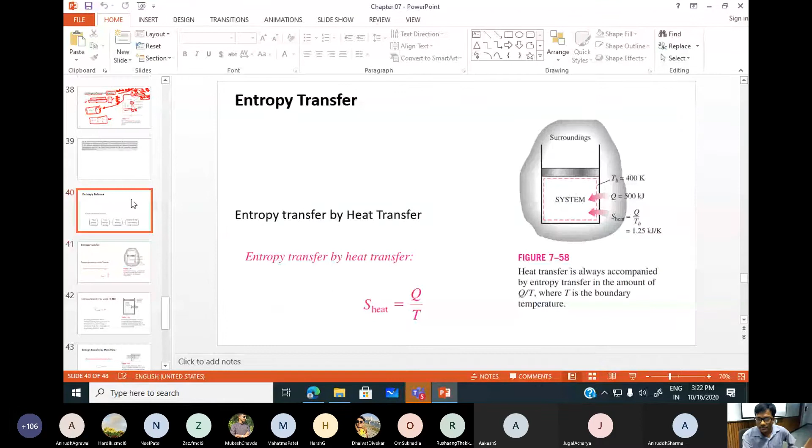Okay, so moving on to our leftover topics that we are going to discuss in this entropy chapter. I will quickly do it because we don't have much time, and most of the things we have finished. So the last topic we are going to discuss is the entropy balance.

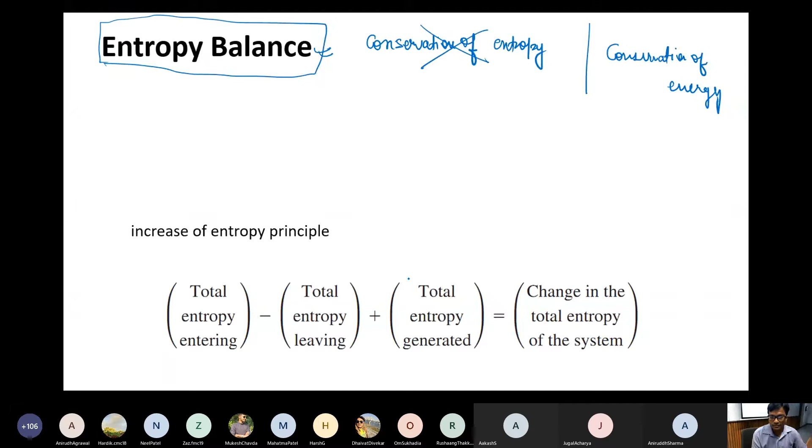So actually entropy balance is not the conservation of entropy. There is nothing called conservation of entropy. You may have seen that conservation of energy is there, but you never have seen conservation of entropy. The reason is there's an additional term called entropy generated, which is not zero, and it happens all the time except when the process is reversible, which doesn't occur in nature. So in nature things are irreversible, and this term is non-zero, giving you this form.

So change in entropy is always greater than S in minus S out. Let's suppose you have a system, some control volume, and you are looking at the entropy changes in the system. So in the system, the change in entropy at state 1 and state 2, when going from state 1 to 2, we see that change in entropy is not equal to S in minus S out.

We also have to talk about S in minus S out, which we have not talked about yet. This is the means by which entropy gets transferred - transfer of entropy into the system or out of the system.

There are several means by which entropy can transfer into the system, via the boundary, through the boundary. So we have seen that this is somewhat greater than what's coming in and coming out. So there is no conservation as such - no conservation of entropy.

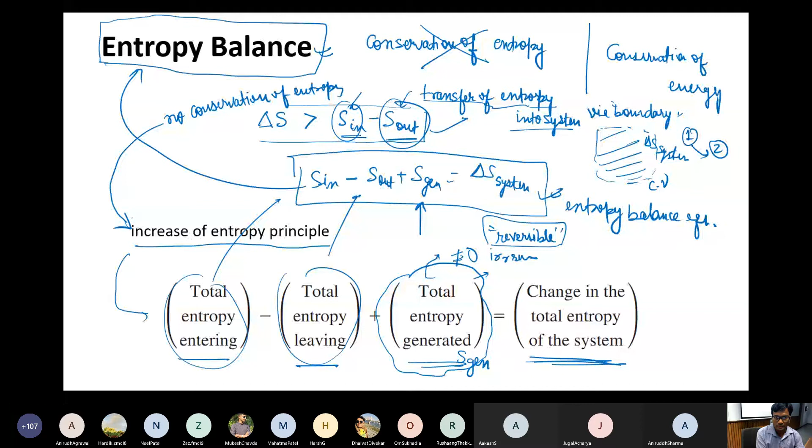Moving towards these quantities S in and S out, how transfer of entropy into the system via the boundary happens, we are going to see now. So entropy transfer is a phenomenon defined as the entropy that is going across the boundaries of the system.

So entropy going across the boundary of the system happens via two means. In energy transfer, we have already seen that energy transfer was done in three forms - what are those forms? Heat, work, and mass. So if there is heat transfer across the boundary, we can see there is energy transfer.

If there is work transfer across the boundary, we told that it's energy transfer too. Again, if some mass is coming out and into the system, yes, it is associated with some sort of energy in the form of enthalpy or all sorts of things. So there are three forms of energy transfer into the system, if at all it is happening. But here, entropy transfer happens in only two ways.

So there is heat transfer through which entropy can transfer. Through work, no entropy transfer happens - it accompanies no entropy transfer. Why? Because work is the most organized form of energy.

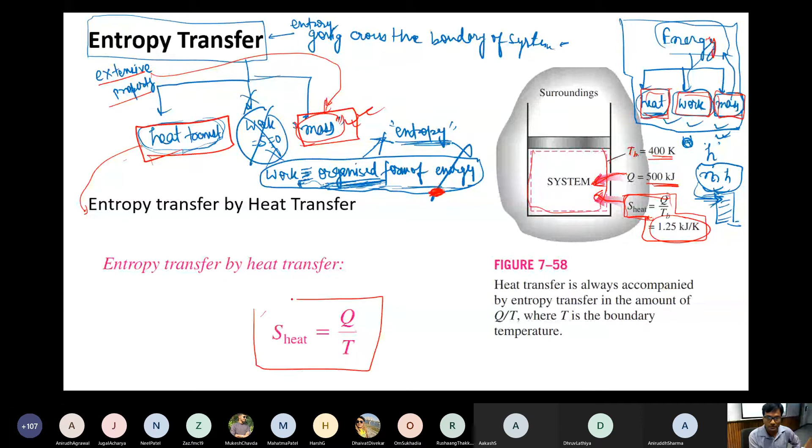And we have already told, since work is the most organized form of energy, the transfer of entropy associated with work is 0. You can move your shaft or your fan, and entropy transfer will not occur if there are no frictions. If there are frictions, something might be happening. So since this is the shaft work happening, if there is no friction, hypothetically there won't be any entropy generation, or there won't be any entropy transfer to the system from outside.

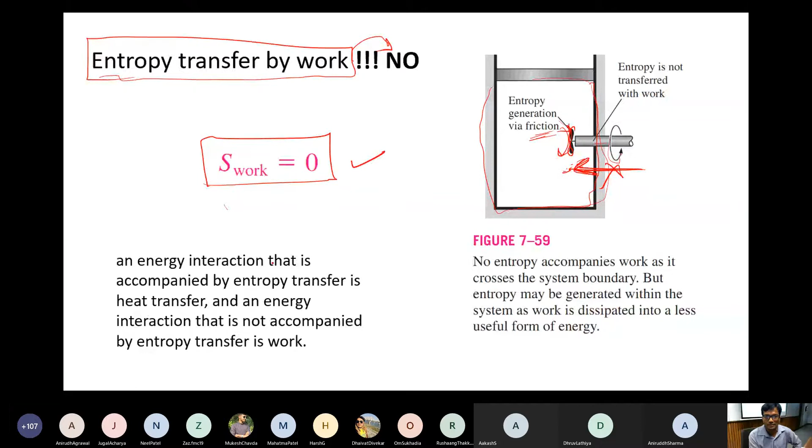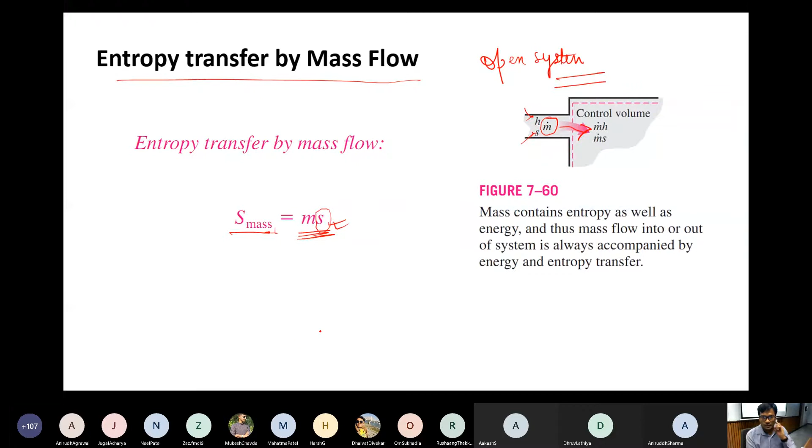Entropy transfer by mass flow is again this m dot quantity that will accompany some sort of enthalpy or entropy, going into the control volumes or open systems. Thus entropy can be transferred through mass - capital S mass through mass. This extensive entropy will be written in terms of mass times the intensive, per unit mass entropy. Yes, we can now arrive at the same - this is nothing but the increase in entropy principle.

Net in and out plus S generation must be equal to the change in entropy of the system that you are considering. Again, in rate form, we can write in similar fashion.

We have done the same analysis in the first law of thermodynamics as well, analyzing the rate of transfer of energies. Similarly, for entropies, the rate of net entropy transferred by heat and mass can be written in an in-out sense, plus the rate of entropy generation, equals the rate of change of entropy. Rate means per unit time, and the units are kilowatt per Kelvin.

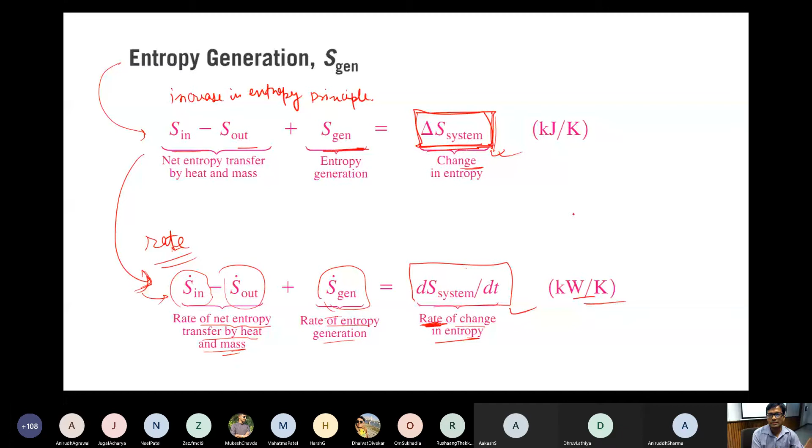If we talk about closed systems, this is the generic formula we are going to analyze. In a closed system, S in minus S out plus S generation equals the change in entropy. This will accompany heat plus mass, both should account for entropy through heat and mass. But in a closed system, no mass is coming out, so the mass terms go to zero, and only entropy transfer through heat will be seen here.

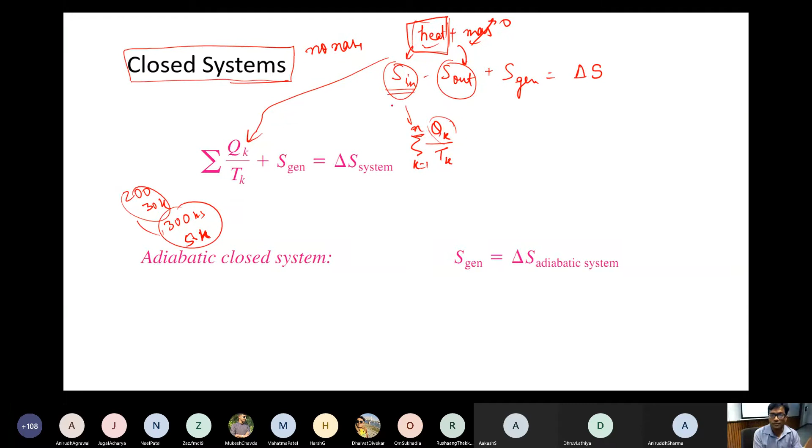So this is written as a summation over k equals 1 to n, however many subsystems you have, based on the way you are transferring heat. Let's suppose first you transfer 200 kilojoules at temperature 30 Kelvin, then 300 kilojoules at 50 Kelvin. These two will be associated with different entropies, so all those things have to be summed up, and this is how it is written.

It is through heat, and you have to take care of in and out. Things coming in increase your entropy and are positive quantities; things going out you take as negative. So you have to keep that in mind. And S generation is there, but there are no mass transfer terms since this is a closed system. This equals the change in entropy of the whole system, so this is the formula you can use directly for closed systems.

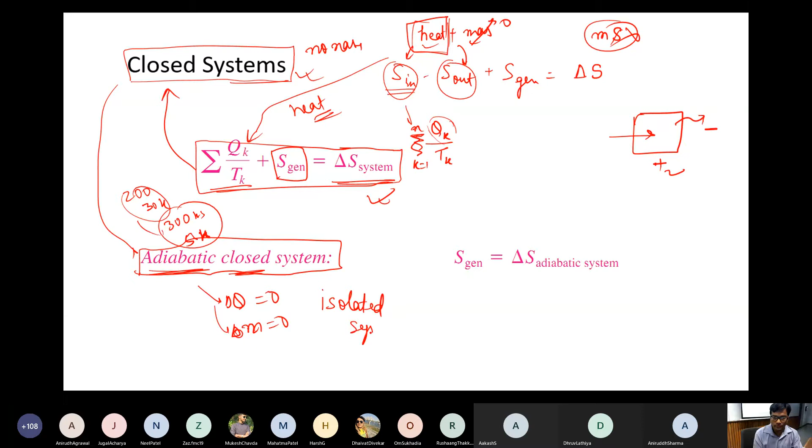One step ahead, if we talk about an adiabatic closed system, adiabatic means there is no heat transfer, and again there is no mass transfer since it's closed. So there's no heat transfer and no mass transfer. Essentially, this is an isolated system. An isolated system accompanies only the change in entropy of the isolated system, having only the entropy generation term, and whatever has been generated over time will be seen as the change in entropy of the isolated system.

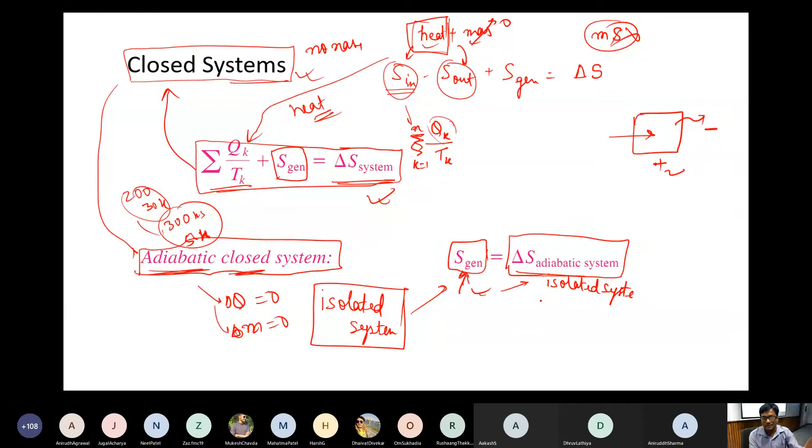Now let's talk about entropy changes in an open system or control volume. Suppose mass in is coming in, mass out is coming out, Q is coming in, and at the boundary the temperature is T, absolute temperature. We can think of entropy in by heat transfer, entropy in by mass transfer, entropy out by mass transfer. The generation term is always there, plus the change in entropy of the control volume. In rate form, I can write this with appropriate rates, and this is ds by dt, the rate of change of entropy of the control volume. This is how you write it for an open system.

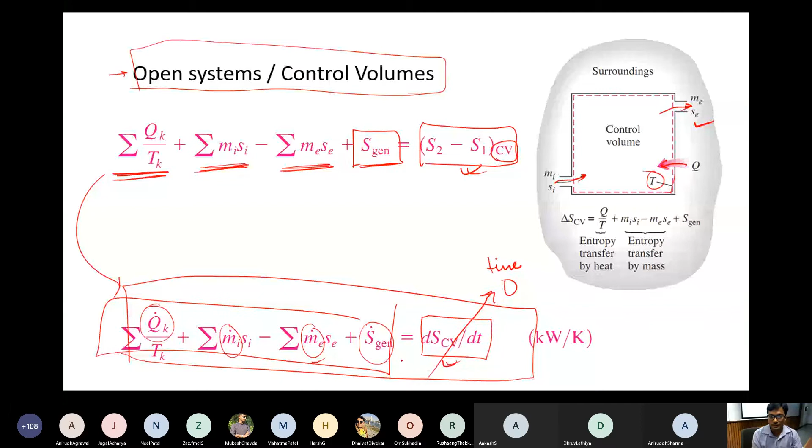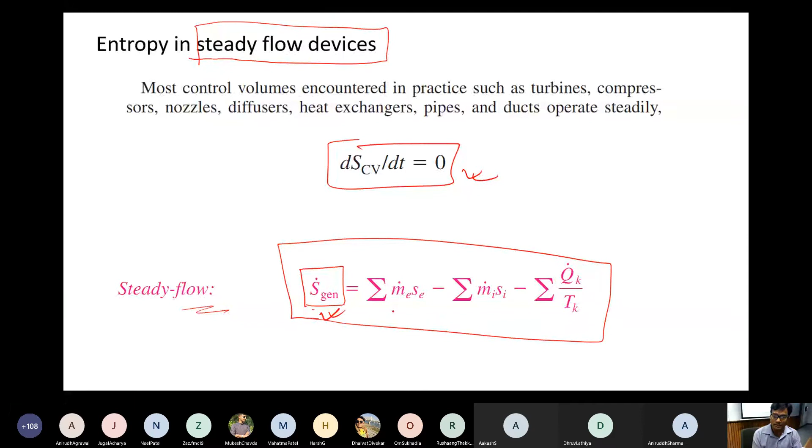Since we work most of the time with steady flow devices, steady means this term goes to zero - your entropy change in a control volume with time is zero. Applying this condition, we are left with this equation, and this is how for steady flow processes this equation is written, or we can estimate S generation, how much entropy generation is happening in steady flow devices. This is all usual, so I'm not going into details.

And this is the last example I want to talk about, then we can either leave or continue. Consider steady heat transfer through a 5 meter by 7 meter brick wall of a house with thickness 30 centimeters. The thickness is given as 30 centimeters, and the other dimensions are also given.

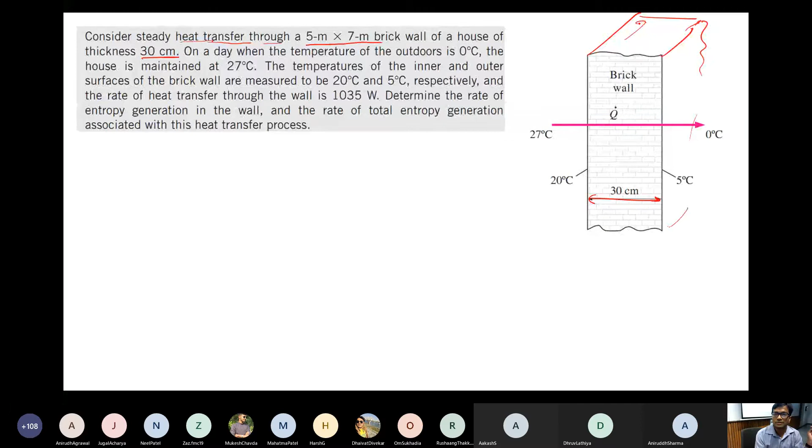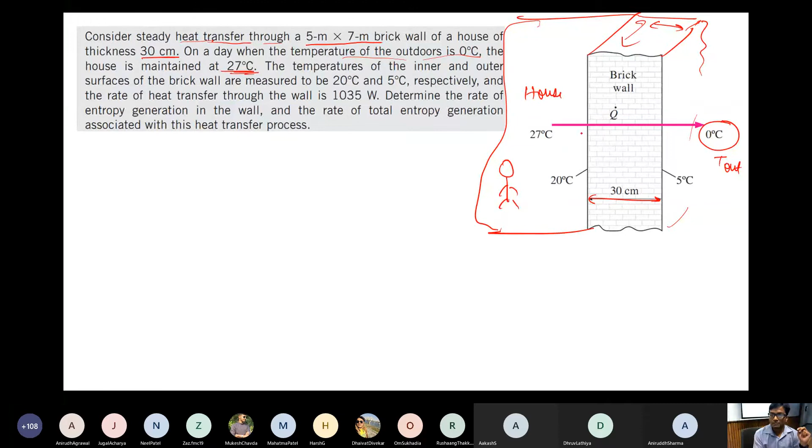One day when the outdoor temperature is 0 degrees C, and the house is maintained at 27 degrees C. So inside this is my house, this is my enclosure, this is I'm actually sitting here enjoying my life. This is outside, it is 0 degrees C. Obviously I'm not sitting in India, it's some cold country example. Outside it is 0 degrees C and inside is 27 degrees C. The temperatures of inner and outer surfaces of the brick wall are measured to be 20 degrees C and 5 degrees C respectively. So the wall temperature inside is given as 20 degrees C, and wall temperature outside is given as 5 degrees C. Although my room temperature is 27 and outside temperature is 0 degrees C, the wall temperatures are given.

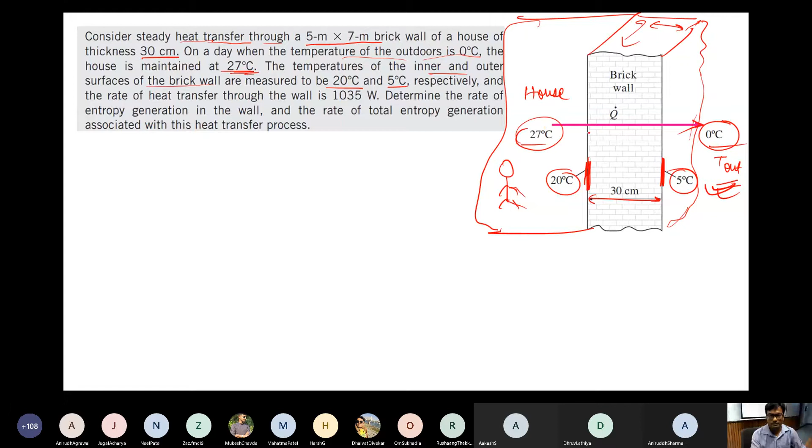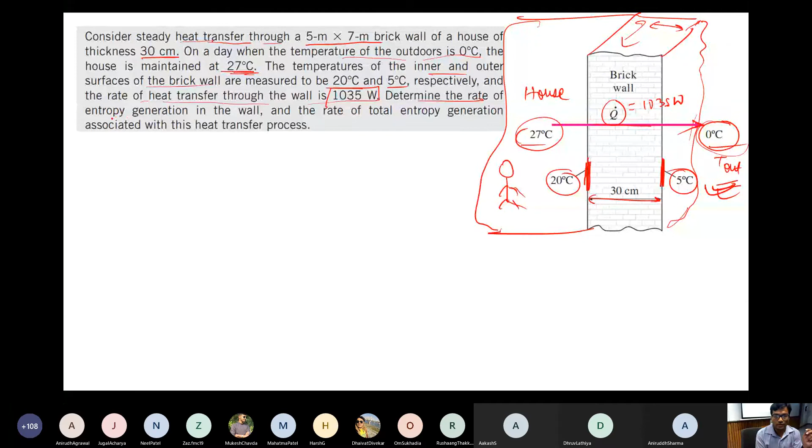The rate of heat transfer through the wall is also given, so this Q dot in watts is given as 1035 watts. Determine the rate of entropy generation in the wall and the rate of total entropy generation associated with the heat transfer process. How will we proceed?

So we have to find entropy generation, S gen, is equal to what, and the total entropy change of the system. Total entropy generation - I'm sorry, total S gen total, total means system and surrounding everything - is equal to what? So S gen associated with the wall, what should we do?

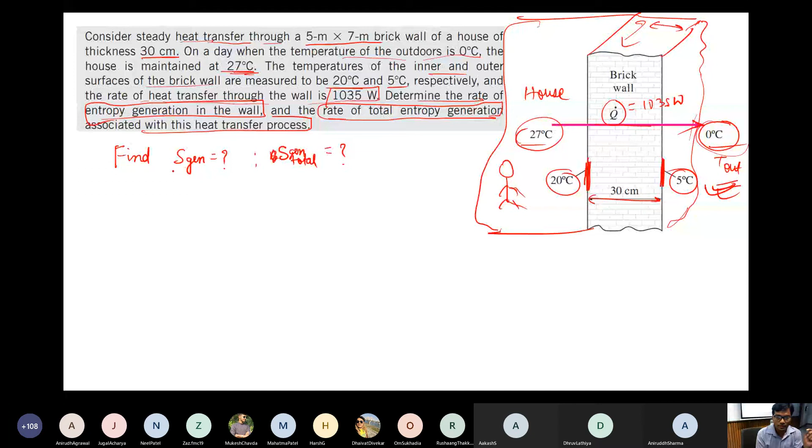So our starting step would be assumptions. So my first assumption would be that this heat transfer that is occurring is in steady state. Things are steady in nature, there is no change, otherwise I could have done the transient analysis. So there is no change, things have reached steady state, things are not changing with time.

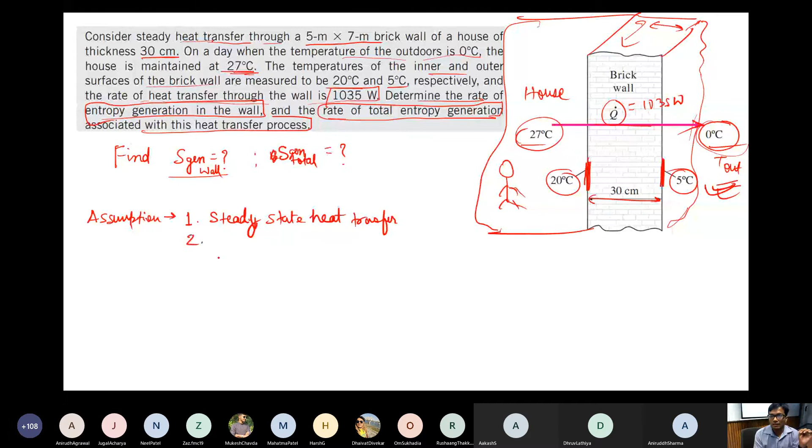So steady state heat transfer is happening. Second, I will tell that my heat transfer is occurring in one dimension only, so in X only, not in Y, Z or something. I will ignore that, that is also not desirable at this moment. So I am only interested, since my wall, this is my 0,0, and I am interested in X direction only. So one dimensional heat transfer is occurring.

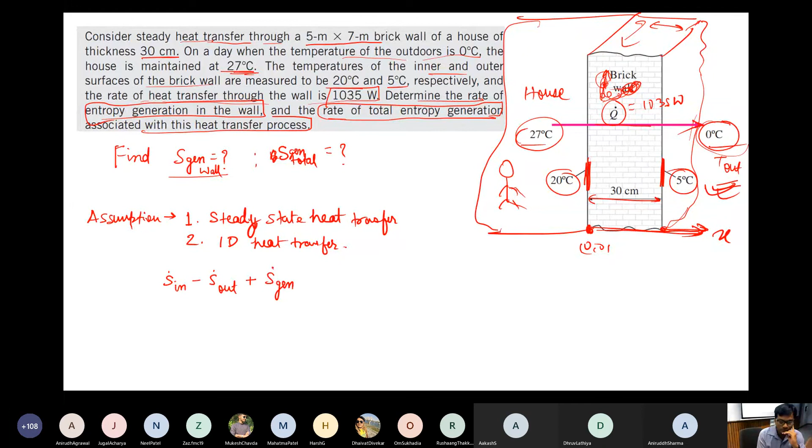Now tell me, somebody tell me how to proceed. Can we apply some formula here? So S dot in minus S dot out plus S gen dot is equal to dS by dt. We also have to do one more thing: choose my control volume or my system of interest.

So I will choose my system as this brick wall only, but maybe I will change my screen pointers. So I want my system to be chosen as just the brick wall, and now I'm looking just inside this brick wall, that's it. Not house, not outdoor, nothing. Now my focus will be here.

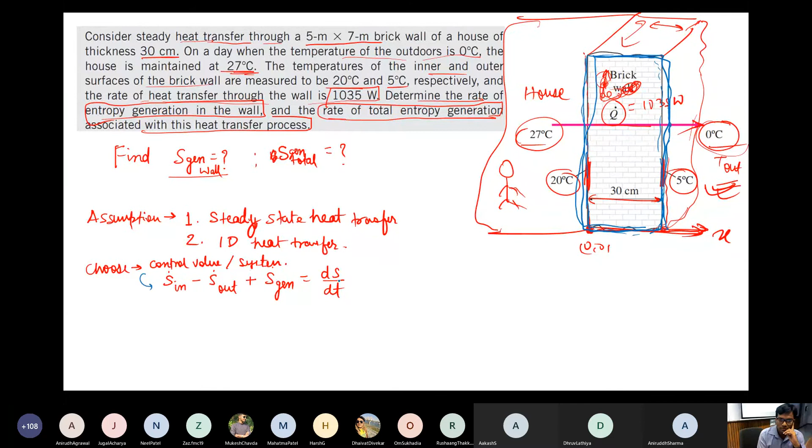Now when I'm choosing it and applying this entropy transfer equation, my dS by dt of system - I have chosen the wall - is going to be 0. Why? Because I assume these are steady, so no accumulation of entropy is happening in the wall, everything is in steady manner. So this goes away, and in and out we need to find - this is my wall, and through wall in and wall out I want to seek. So this is 0. So S gen wall is equal to S dot out wall minus S dot in wall.

What is my S dot out wall? What is that? Through heat transfer it's happening, no mass transfer. So this is Q by T.

Wall, since I'm looking at the wall, I have to take the temperature of the wall, and heat transfer is given. So heat transfer is given as 1035 watts divided by T wall, which is 20 degrees C to 273 plus 20 degrees C. Can somebody tell me what this thing is? This is again Q by T wall, but this Q is going into the system, so this is positive.

And this would be negative, so Q is coming out of the system, or we have already mentioned that by taking this minus sign over here. We have already taken care of that, so we'll not take care of signs here since we have already taken care of the minus sign in and out. So Q wall is 1035 watts divided by T wall at this end.

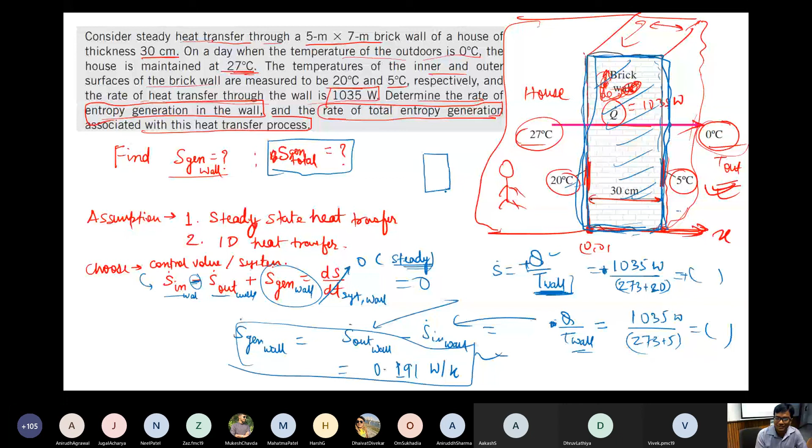Okay, I'm really sorry, so this would be this, and this would be this. Thank you, who is that? Yes, okay, thank you, Vivek. Thank you man, thank you Vivek. Thank you, you should keep this in mind. Thank you, it means you guys are listening.

Okay, for total entropy generation, so I have a system, and I will take the immediate surrounding as well, so it will give me a kind of total.

So immediate surrounding temperature, now this 27 degrees C you have to take here on this side, and this side you'll have to take 0 degrees C. And now heat transfer would be similar Q. Then you will have some other S total will come, and that will be 0.341, so we can see watt per Kelvin.

So we can see 0.341 is greater than 0.19. So why have we seen this increase in entropy? More amount of entropy change has occurred because we have considered the thin air or the air outside the wall as well. Yeah, it's obvious also, you have more matter, more chaoticness will be there. Yes, it's obvious, nothing surprising.

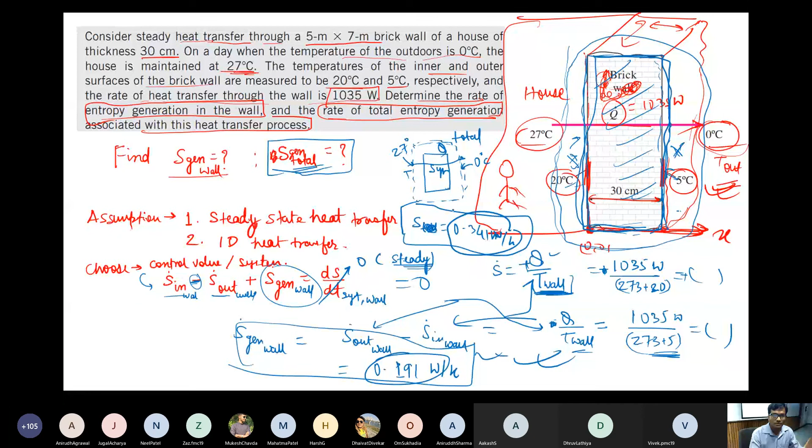Okay, because we have extended our system, and that is how we are going to estimate our entropies, entropy generations, and everything. So maybe I will put one assignment to encompass all sorts of numericals related to entropy, mass transfers, generations, and all sorts of things. Soon I will put it up, and this will conclude your entropy chapter.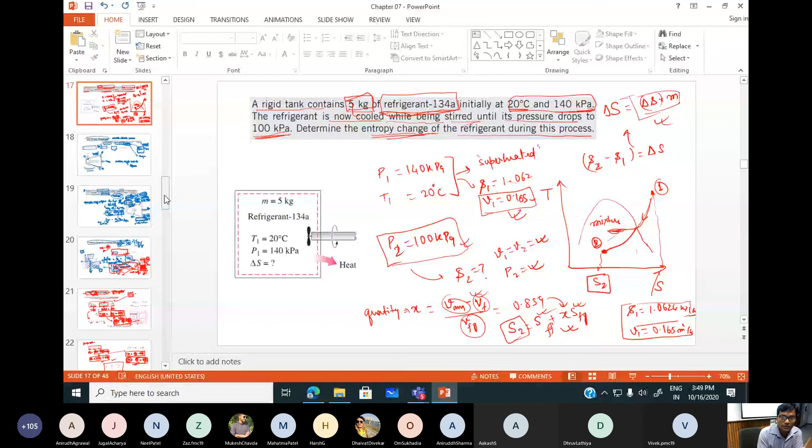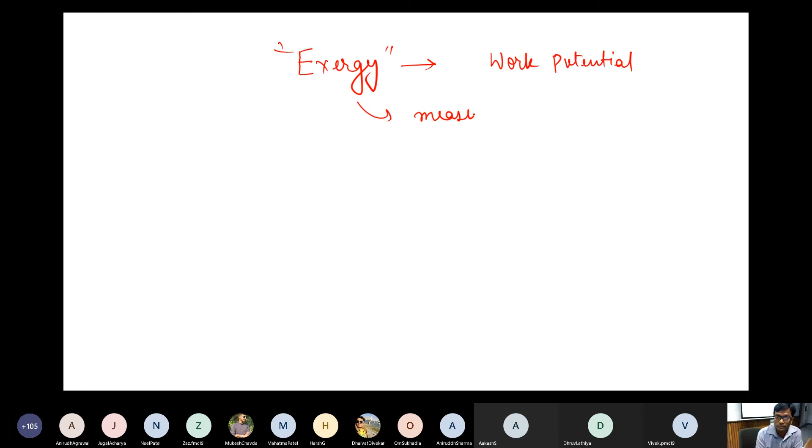Next thing I'm going to talk about is the exergy. Just to motivate you guys, exergy is also an important thing to measure. This is also called work potential, and this is a measure of... I'm not taking too much time, I've already taken too much time. So, measure of maximum work or useful energy in the system.

Basically it's a measure of useful energy, how much useful energy is intrinsically in the system, and how much maximum work we can get out of it. So suppose you have an energy expenditure, so you will have this much amount of useful energy in it, and these many are unuseful energy that any system accompanies. Most of the things are useful, but yes, there is a large chunk that is unuseful, and that is more of our concern, the useful energy. But this also we need to limit, or we cannot do anything, but yes, we need to know how much usefulness of energy the system will accompany and how much unusefulness is there. We cannot do anything about that. So that is called exergy.